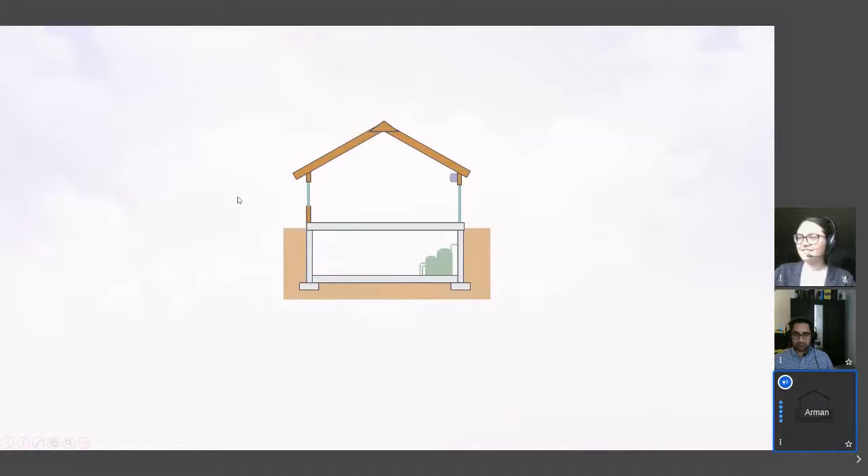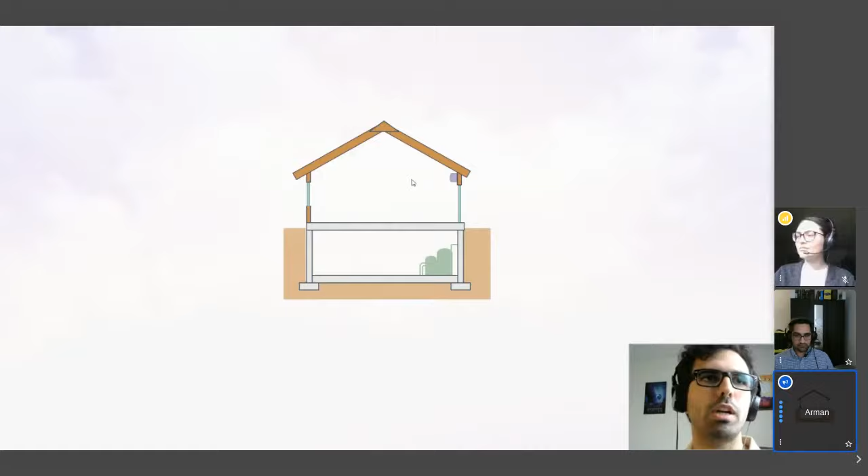In last webinar in March, we first talked about approaching energy efficiency in a building. When you talk with a builder about making their building more energy efficient, the first thing they may think of doing is working on the roof. For example, they may say, hey, we have learned that heat goes up because of hot air buoyancy, so we will spare no cost on the roof. We will make a very good system that performs really well, but in the meantime it is costly.

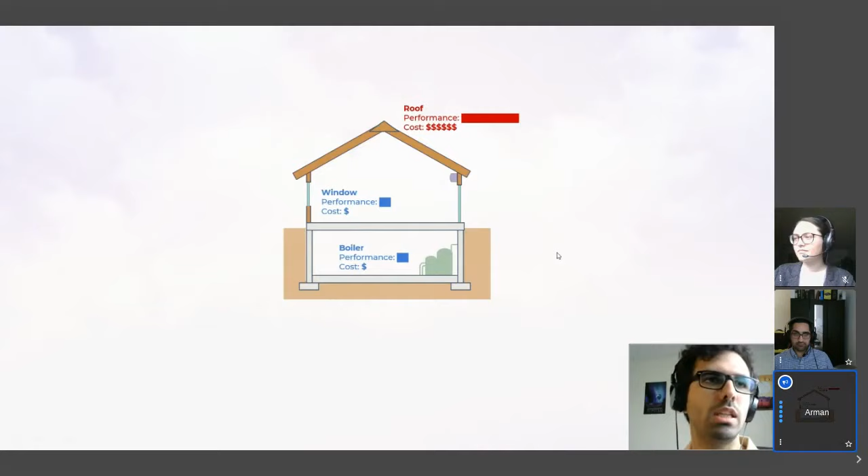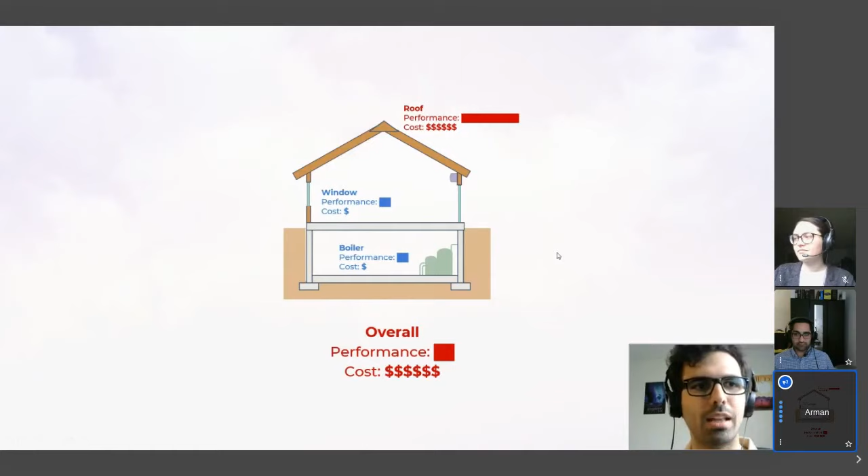They may skip doing more things around the house and think that should be enough, without working on the windows or the mechanical system. Now, if you actually give this to energy simulation software, which is the technology right now needed to ensure energy efficiency compliance in a growing number of regions, including British Columbia with the BC Step Code, you will learn that this house is actually going to perform really poorly, but it's going to cost a lot.

If that doesn't sound intuitive, the example we like to provide is: imagine you go skiing on a very cold winter day, but you go in shorts. You're uncomfortable, so you put on a jacket. You're uncomfortable, so you put on another jacket. That doesn't really create more comfort for you, because you're not addressing the place where the heat is escaping.

That's also the failure with this sort of design: the roof is over-insulated while heat is escaping from other areas of the building, and the mechanical system is inefficient, so the amount of energy that goes into it to compensate for the lost heat is a lot.

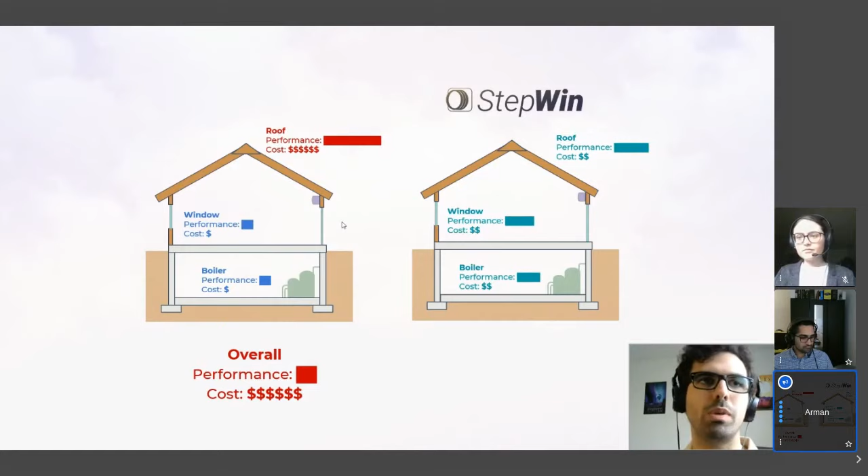Now if you take this design and give it to a StepWin, the first thing you'll notice is that we try to balance different insulation pieces. We find where we can save some of the costing from the project, and then find other options that may be marginally more expensive in their own class inside the building, but overall give you a more performant design and a more holistic performance.

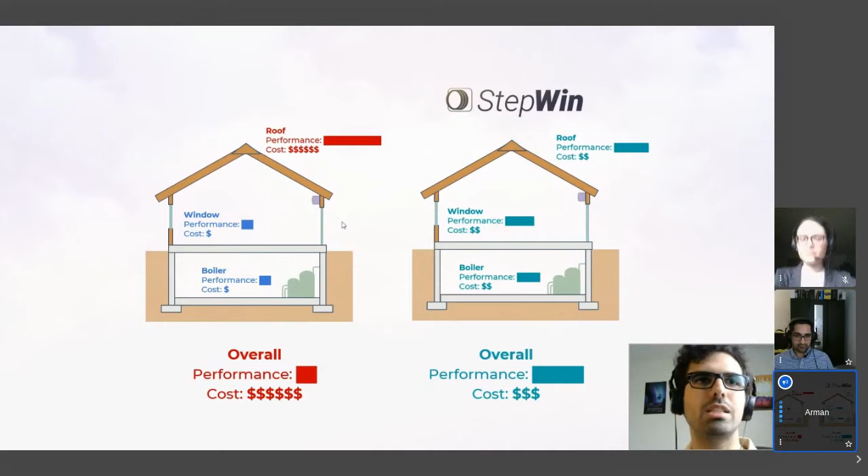Think about this example again like skiing, but in a tracksuit, a skiing onesie that has a very thin layer of insulation, but continuous and harmonic all around the body. You keep the heat in from all places, and this is why this building performs better.

We also talked in the last webinar about the amount of detail needed for starting an energy modeling process in a project. I think it's very important to keep in mind that you don't need to jump ahead a lot inside the construction process to actually have good energy modeling happening.

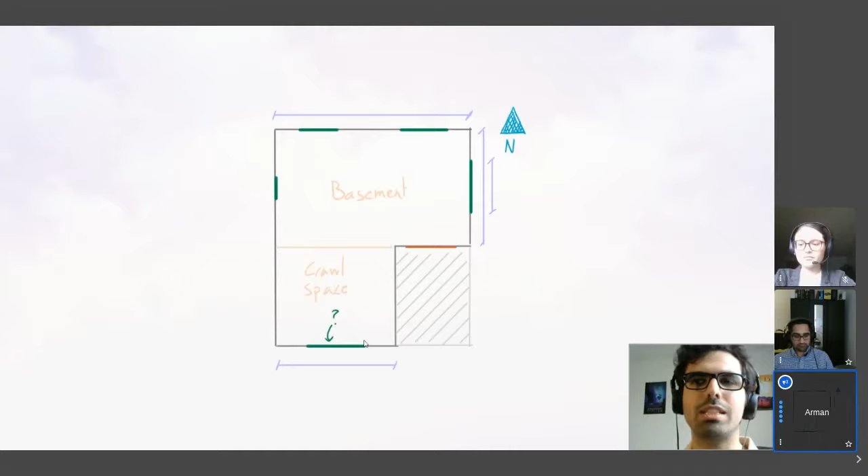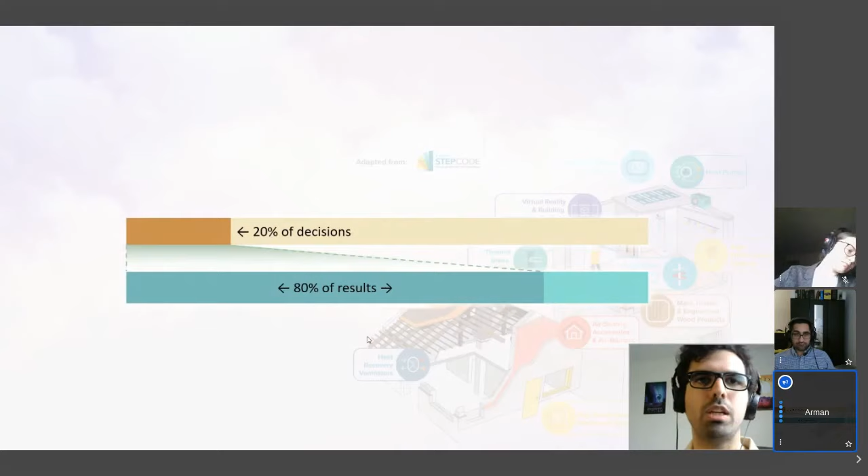Going early in the energy modeling process and energy compliance process is never a mistake, because we have seen this 80-20 scenario happening in different projects, that the first 20% of the decisions you are making in a project will take you 80% of the way. You want to make those decisions early on and create a solid foundation for the rest of the project to actually have high performance designs based on the choices you do. Failing to do that will actually limit all of the things that you can do to get your design to the next level, and that may create more costs and hurdles along the way.

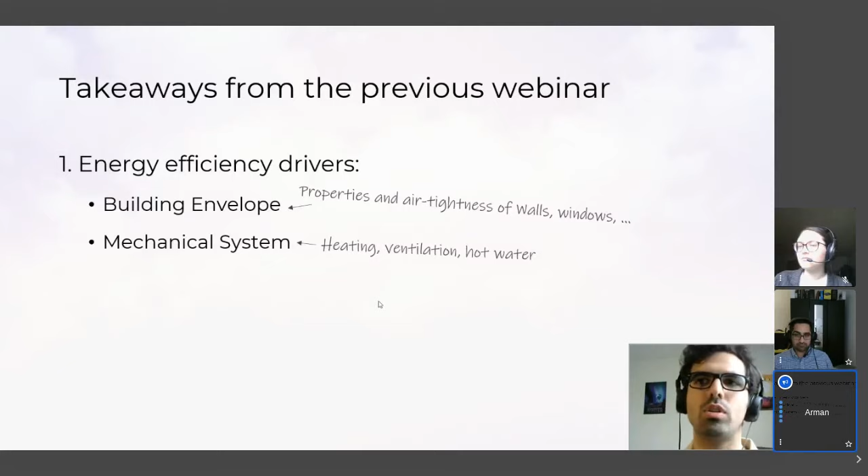So again, from the previous webinar, our key takeaways were identifying the energy efficiency drivers, including the building envelope, or the terminology of basically talking about properties and airtightness of the shell of the building, different pieces such as walls, windows, roofs, etc. And also the mechanical system, the heating, ventilation, hot water, providing those active elements. Think of these two as the active and passive elements inside the house, and they need to interplay with each other in order to make an overall good design.

Another thing we talked about in the previous webinar was a compliant design versus the best compliant design. I think this is important to keep in mind that there was this BC Step Code Metrics study done, which looked at a few options for different parts of the building. For example, for ventilation, 5 options; for windows, 7 options; for roof, 6 options. Multiplying all of this together gives you an enormous number of possible cases, which you cannot really switch between without considering each of them one by one.

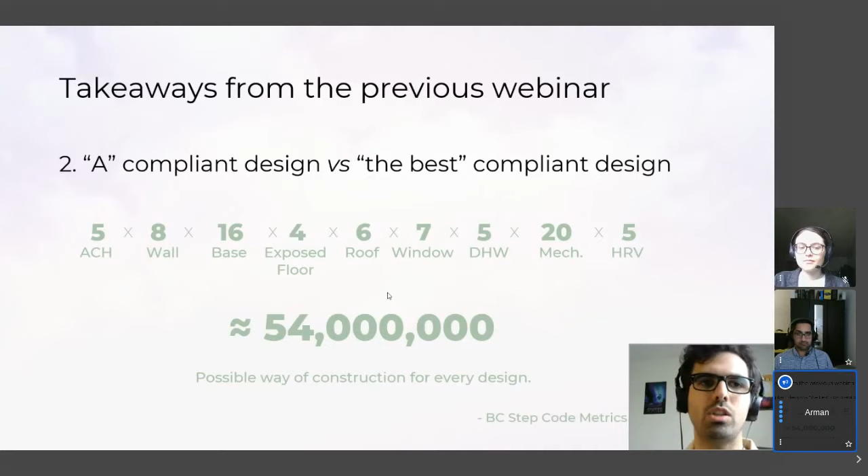We have this very important restriction when it comes to a project, by the limitation we have of finding what is the best combination. That may create a significant difference in the ease of reaching that energy efficiency level that the project can reach on the same budget. So we talked about these issues.

Now we are going to talk about solutions in this webinar, opportunities, how this transition in the performance-based construction is going to hopefully help us not only provide better products to our customer, but also use this opportunity to deliver the next generation of construction.

We're going to talk about 4 missing pieces in the design process that used to be there, and now they have become a necessity and they cannot be ignored anymore. We're also going to talk about energy efficiency and its relation with the rest of the building project, and we're going to talk about the success pieces for the stakeholders. Last but not least, my colleague Sahand is going to give you a StepWin introduction and talk about how all of these pieces tie together with the use of StepWin.

So let's talk about this webinar through a story. I want to tell a story of a builder. Hypothetically, let's just call him Sahand. He just bought lot 70, and he wants to build a dream house on top of it. So he goes around, he finds his architect, he finds the rest of the crew for his construction team, and they team up to create a project.

They go to their city—well, they don't go, hopefully, because of COVID-19. They check online, and they realize that the city is requiring them a step 3 house to be built in this lot, and now they want to take their performance-based project forward and find the best design.

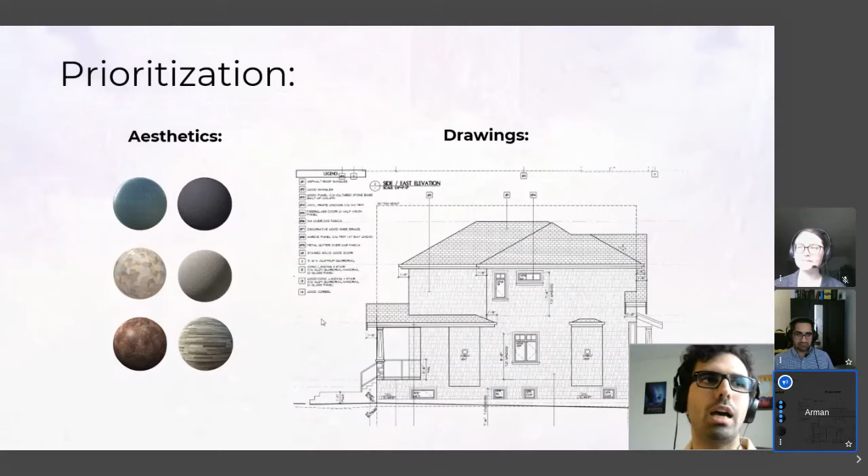The conversations really come down to the market of a house. Once they have finished all of these considerations, they will look at the timelines, the budget, the landscaping, all of those pieces. And last but not least, it's time to actually think about the energy code.

Of course, they have an idea about what sort of wall would pass energy efficiency, what sort of framing depth they would need. But doing the major work of energy efficiency is left for later stages. So the first key missing piece in this project is that energy usage has mostly been an afterthought.

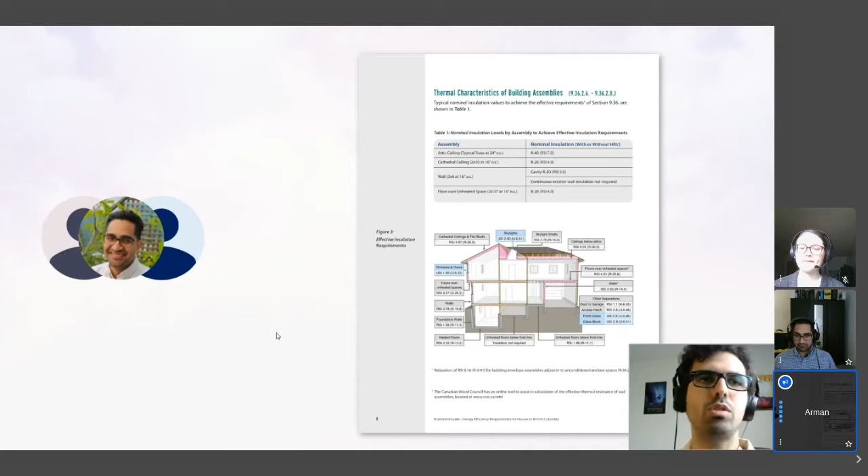Then when they go to look at the energy efficiency, the architect and the energy advisor from the construction team go by the climate zone. They will find perhaps this illustrated building guide, which tells them what level of R value or insulative efficiency they would need for different parts of the building. Referring to this, they can make sure they are putting the right insulation in the right places.

But the thing is, this separation of these systems in the house may not really give you an overall proper capacity in the construction you are doing. It's really case by case basis that the overall performance shows itself. Let me give you an example.

Here we have a wall, this white section, passing 0.25 watts per square meter of heat. And you have a window passing through 8 watts per square meter. The window is relatively very small, but if you look at the overall system performance, you'll see this total system is passing through 1 watt per square meter - that's 4 times the amount of heat that the wall on its own is passing through.

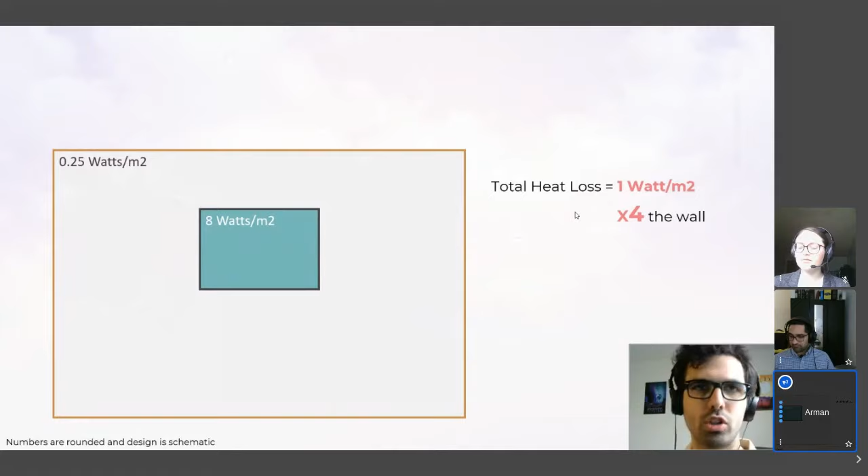But if I make the window even larger, that heat transfer is going to be much, much larger, almost 10 times the wall insulation level.

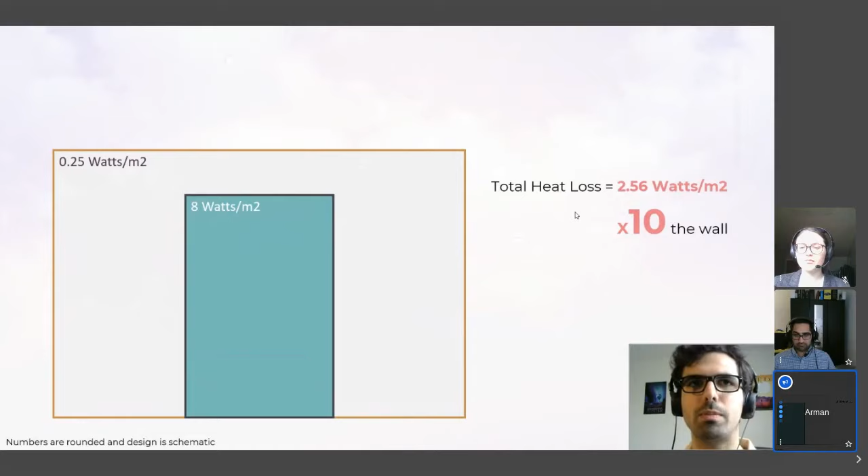If this doesn't sound intuitive, think about the building envelope - those walls and windows - as a bucket, and the energy being water in that bucket. Even if you have a very small hole, all of the water tends to escape from this envelope, and you need to invest in fixing those issues. It doesn't matter how thick the wall of the bucket is - the water tends to escape from the path that it can escape from, and that's the holes.

So the second issue is that looking at different building components individually is not yielding an overall strong performance in potential cases. It's a case-by-case basis depending on what project you have.

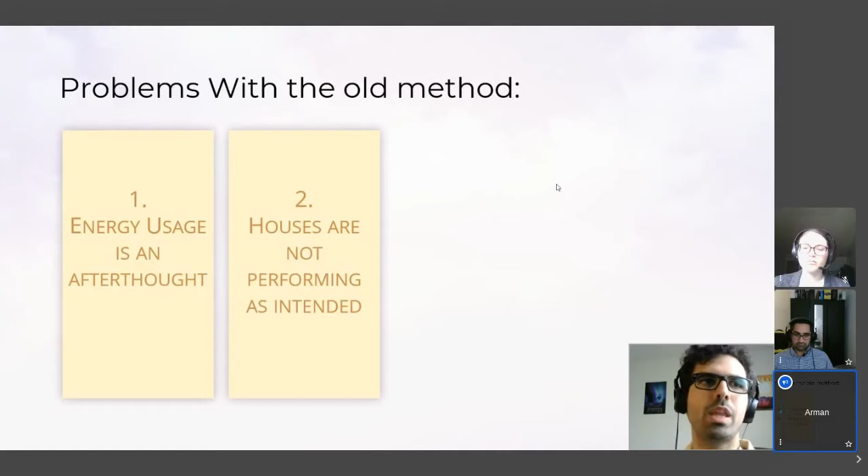When we look at the Canadian data, we see that the average house in Canada, based on numbers from a few years ago, is spending more than 120 gigajoules of energy per year. Putting this into context - imagine when you make pasta, you put cold water on the stove, how much energy it would need to bring that cold water to boiling. Now, 120 gigajoules is enough to boil up a swimming pool.

And that is for one average house for a single year in Canada. So the importance of moving to something better should make itself apparent.

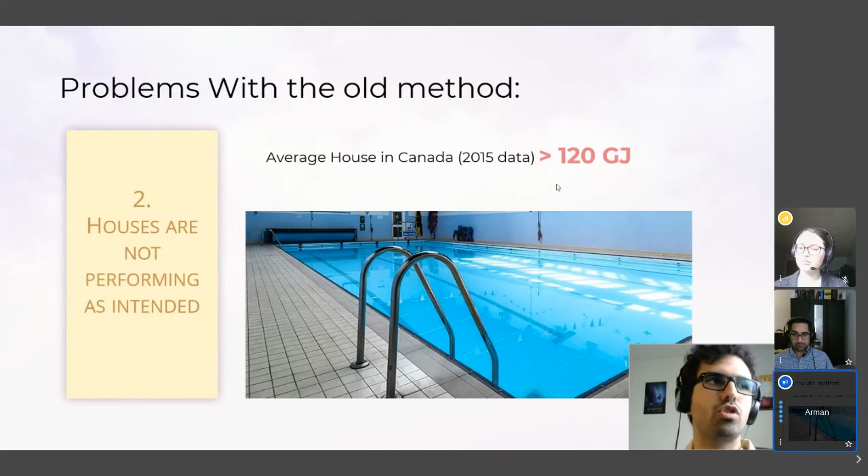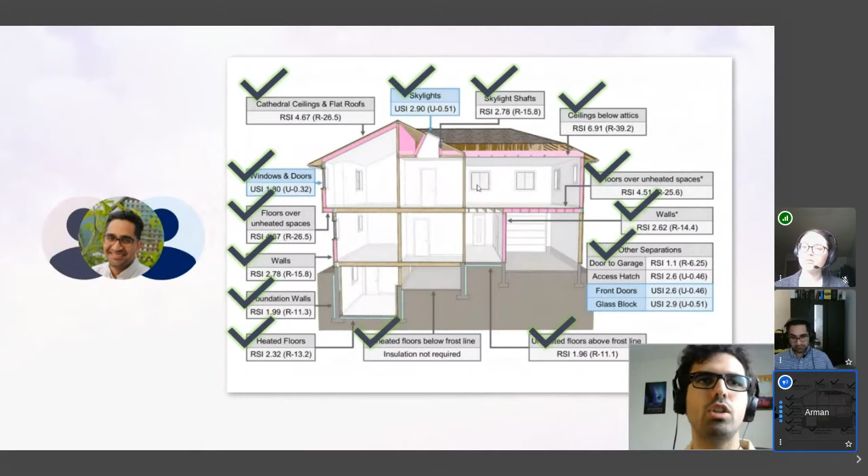Okay, so let's say we take it at an individual level - we look at different individual pieces. So Sahan's team, the architect, the energy advisor, they take note from these systems and start putting that information down. Now it's time for Sahan to start calling different manufacturers. So he finds three companies for windows, three companies for framing and installation, and multiple companies for other things, and starts making choices between these companies.

So for the windows, he goes with company B, and when all of the properties are the same, the aesthetics are the same, it all comes down to Sahan knowing he has a high school classmate at that company who is a sales rep, and he just goes with that one.

For framing and installation, again looking at very similar quotes and situations, he goes to company C because they worked out in the last project, and that's a more than valid reason to use someone for this project as well. For other aspects of the project, he may continue working with people based on cost recommendation, his intuition about why one product or company would work better than the other, or some arbitrary reason.

This brings us to the third problem: building choices do not need to be scientific. Well, some of them need to be, but a lot of these choices are left to the builder to make, based sometimes on external factors that don't really have anything to do with the quality of construction. And last but not least, all of us have a finite amount of time, so in the process of finding the right product, contractor, or supplier, some people get missed - lost opportunities that potentially could have provided better quality construction.

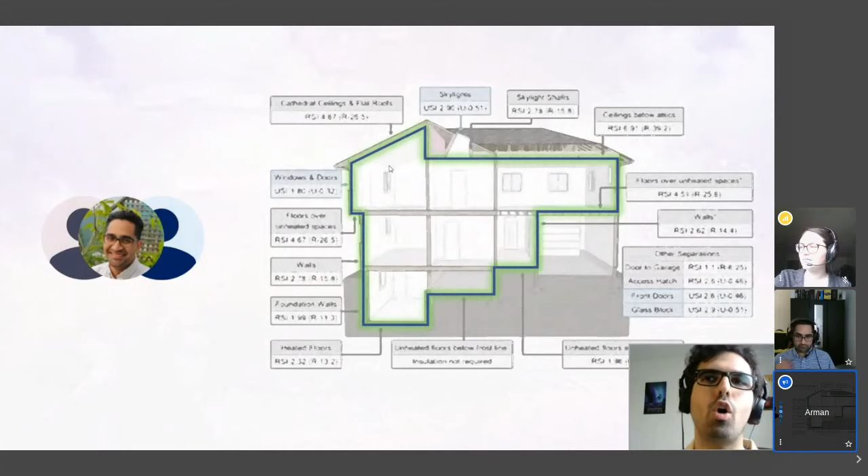Now, in performance-based construction, we don't really think about individual components - thinking about the examples provided, it only works if we think about the building as a whole. So the construction team will go through the whole system, look at the whole envelope, identify the key pieces and weakest paths of heat loss, and try to holistically make the system better. They'll try to keep the heat or cool in and minimize the need for active elements, which will make a home that needs way less than 120 gigajoules of energy every year.

But this also creates a new challenge, because anything you change in this house is tied into all of the other options you have in the construction. So every change will have cascading effects on other changes, and this is not intuitive for the construction team to navigate. Coming up with the best design seems almost impossible with the previous systems to go through this design process.

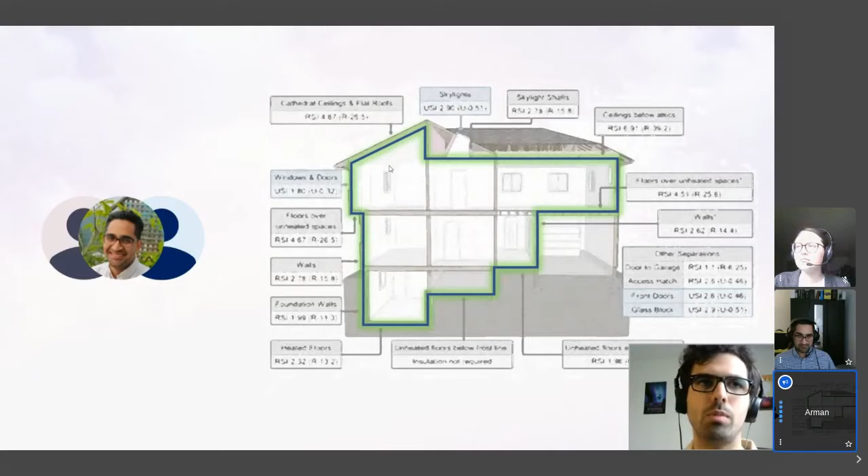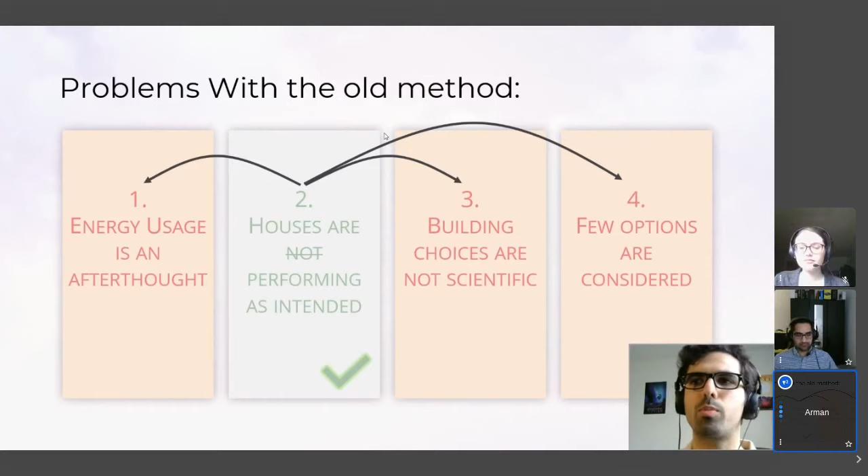So as we started to solve problem number two - that houses were not performing as intended - we have exacerbated the negligence of other problems we had in the construction process. We cannot now omit the usage of energy efficiency early within the project. We cannot go with gut feeling for finding the best construction choices. And we cannot limit our scope in terms of what building choices are available to us. Finding the performance solution requires all four of these problems to be solved at the same time.

So that's what StepWin essentially does. We take all of the choices you have within a project that may confuse you, or may not give you that foundational design you need based on your project. And as every project is different - each project can have 54 million possible ways of construction for that individual scenario, based on climate, the shape of the building envelope, and the building shape in general - this system becomes very, very complex. But StepWin simplifies this process by a lot.

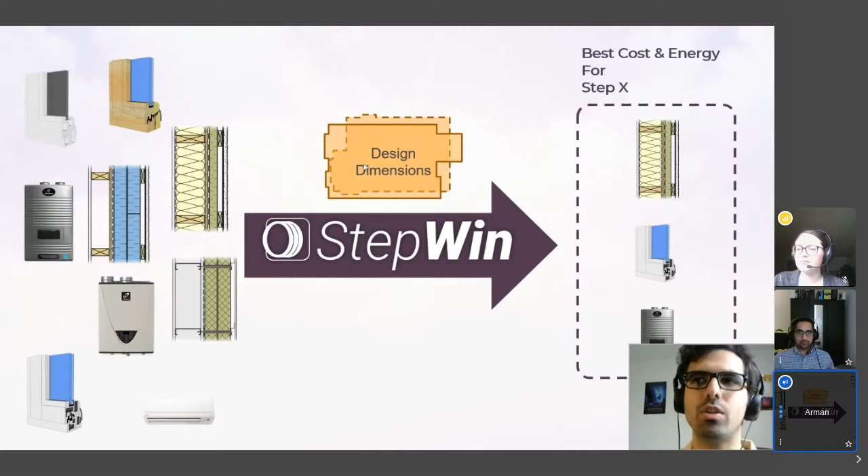We basically get all of the choices and dimensions you have, the sort of building you're thinking about making. And again, the level of detail will be very low, something you can start using at the very early stage of the project. And a StepWin will give you the best cost and energy performance for that particular step, cherry picking all of the options that work together integrally, and they are also not breaking the bank.

Thinking about this system, it really works well when you have a starting point. So let's say Sahan is limiting his design process to finding his process constraints, finding what sort of things is most important for him. And he comes up with three window systems that he wants to explore more than everything else.

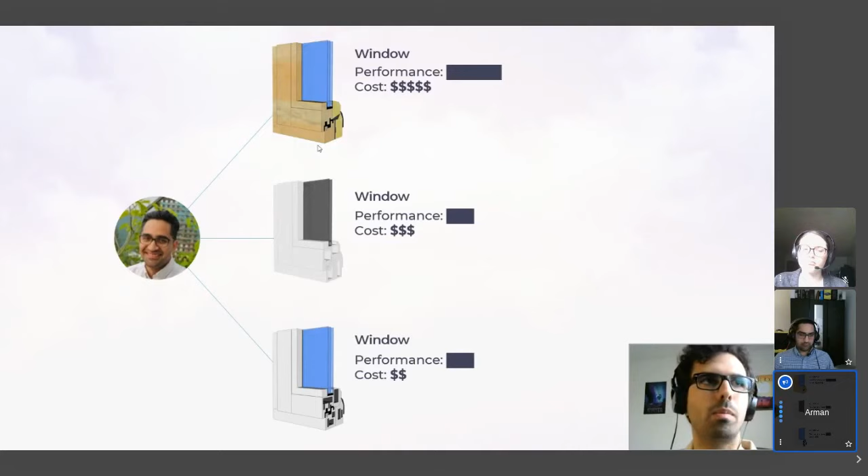One of them is very costly, but is also high performance. The other two have somewhat comparable cost and somewhat comparable performance. Without a tool like StepWin, he may go with one of those. But as you look at this project in the whole arc of it, you will see that each of these systems, each of these starting points, sends Sahand down a completely different route.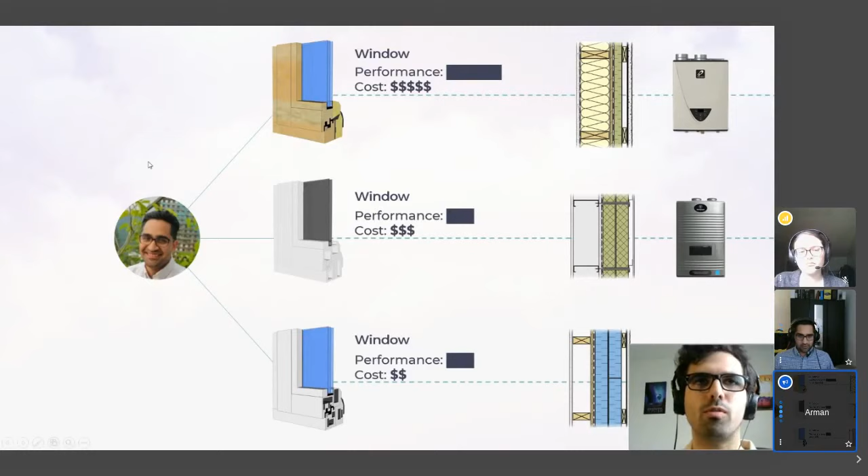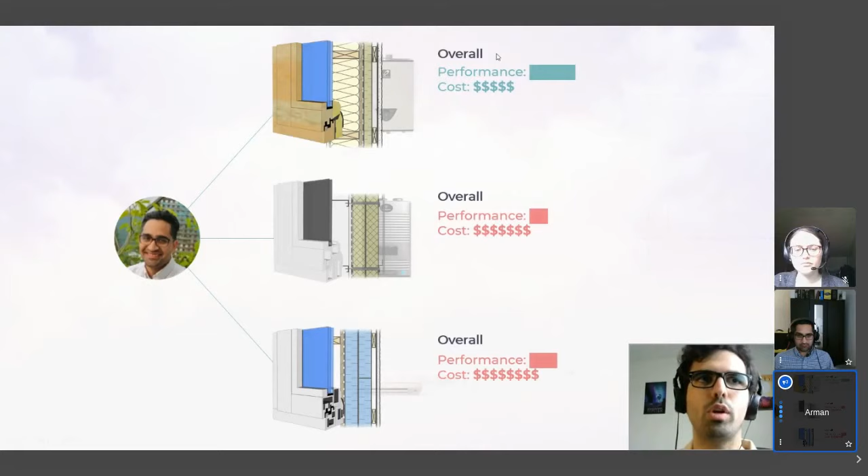A route where each of these building choices may lead to other choices. And when you look at the overall performance of the building, you may actually see that that expensive window, although it seemed like a premium in the beginning, at the end of the project, when we look at everything overall, has been a cost saver, because you didn't need to go over other parts of the building and try to compensate for its shortcomings. Think about the example of the leaky bucket - we're essentially just spending our funds on addressing the leaks instead of doing other things.

The other byproduct of this process is that now Sahand has very specific criteria for what he will need in the project. We just don't ask him to go for a high performance window. As you will see when Sahand goes over the StepWin reporting page, what we're telling the builders are very specific numbers - for example, it could be a U value of 1.2 and solar heat gain coefficient of 0.35.

That would mean that the manufacturers who are providing that flexibility in their options are going to be the best choices, because now we have a lot more capacity in order to meet the project's demands.

So I want to leave you with these conclusions, bringing everything back together: a successful construction team works on three major things. The first thing is that they start the energy efficiency conversation early. You may get tired hearing this from us on and on, but the reality is that this conversation for many projects is not being started early. So start it early and know the level of detail necessary for that - it's not a lot.

The second thing is identifying the right project constraints, where the project can use some of these options to come up with a better design, and where it's very important for the design team to limit the options and start those limiting options as the starting part of the design process.

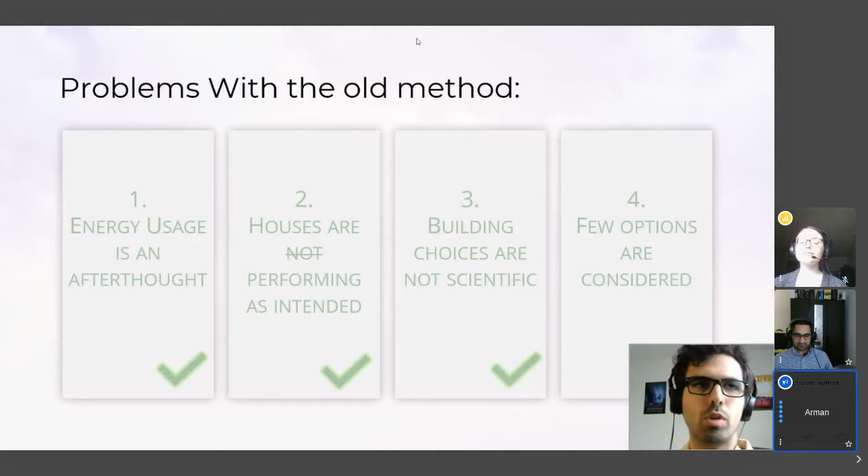I'm Sahand and I'll be doing the StepWin website demo for you guys. This is our introductory page, with an introductory video that our team has made, and we're going to go to the first step of this process.

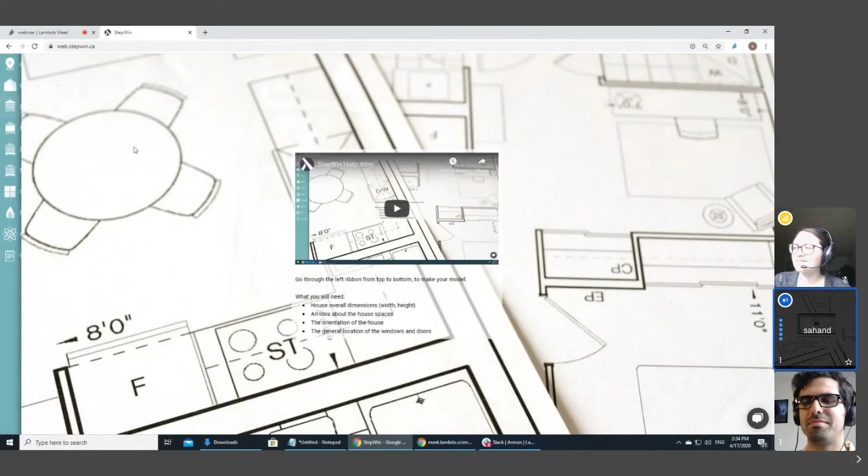The first step is the climate page, which will be asking for your address. Here we have a dummy web address at Port Moody. We're offering services at Port Moody, New Westminster, Kelowna, Kamloops, and Penticton currently.

After you input your address, we go to the general page, where we ask for the general shape of the building. For this case, we have a 2-story building with a hip roof and a cathedral roof, and basements for this building.

But we could have any combination of these. You could have flat, hip, gable all together, or you could have crawl, slab on grade, or basements all together, and depending on which option you choose, we might ask you for different things.

For example, since we're asking for cathedral, we ask for house volume, and you can choose whatever units you're comfortable with. For example, I'm choosing cubic feet here. We'll also be asking you for exposed floors and adjacent unheated spaces.

There is an information button here that you can click on, which will take you to videos explaining exactly what these are.

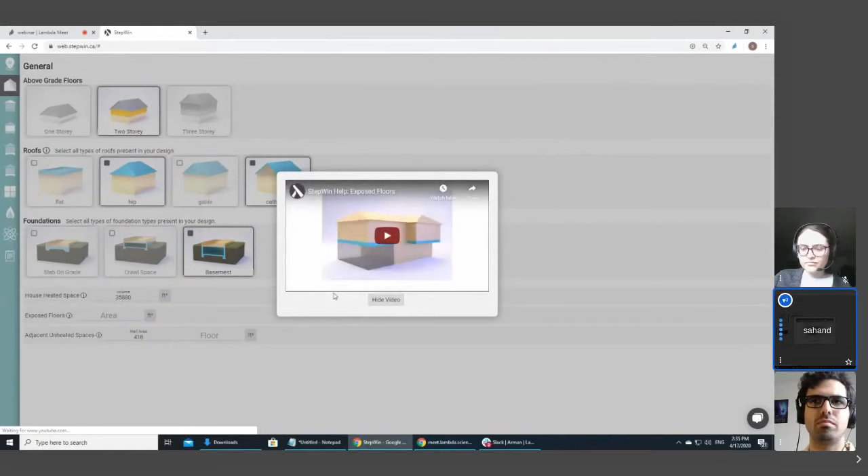On the next stage, we're going to do our roof assembly design, so we'll have interior and exterior insulations for our cathedral roof. These are default assemblies, but we can add other assemblies as well.

You can add your own custom assembly with your own R value, material cost, and labor cost. You just fill in this information, and our software will include that into your computation and optimize for the best cost and best value for this specific design.

Since we have a cathedral roof, we also have the option for skylights, so you can put the correct direction for the skylights, their dimensions, and the type of skylights they are.

We go for the attic roof next, its dimensions again, and the default assemblies we have, which are 12-inch and 18-inch blown-in insulation. But feel free to add your own specific insulation needs, your own costing, and your own R values, and our software will include that in our computation.

The next page will be our main floor and second floor wall assemblies, basically, and the general shape of the building.

You'll be asked for your wall assemblies, and you can add your own different wall assemblies here. You'll also input your area parameters and the wall heights for the first floor and second floor.

We'll also be asking for your windows and all sorts of openings - windows, patio doors, entrance doors for the first floor and second floor.

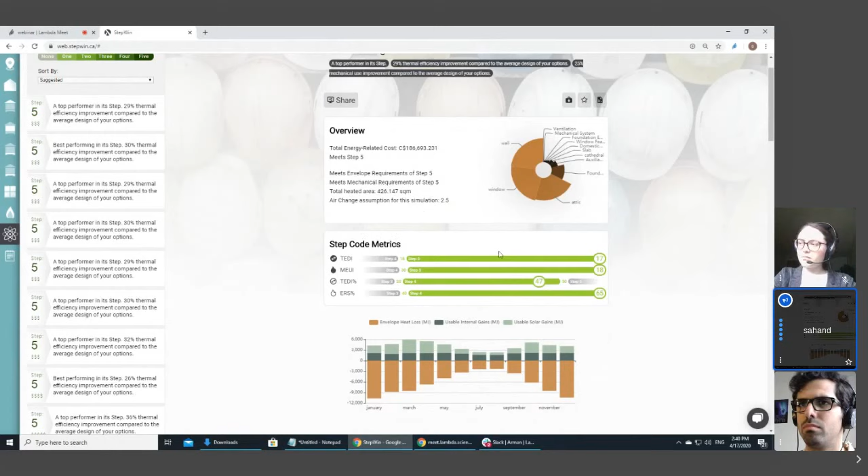And we're providing the most important factors here: your TEDI and MEUI values, and your TEDI% and ERS percent, which indicates that this house is a very, very efficient house at step 5, basically.

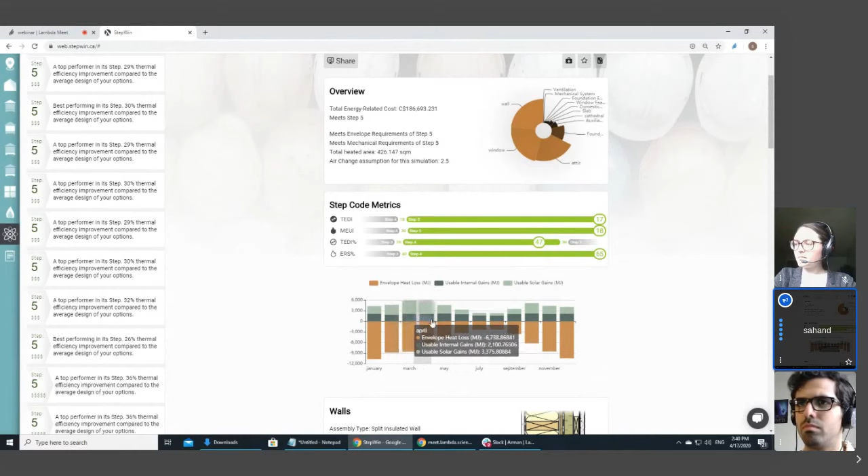We have your heat losses here, and as you can see, in the springtime you get a lot of sun in the house, and it heats up the home. It's usable, very high usable solar gain. But when it gets to warmer months, you don't really use that sun much, and in the winter times as well.

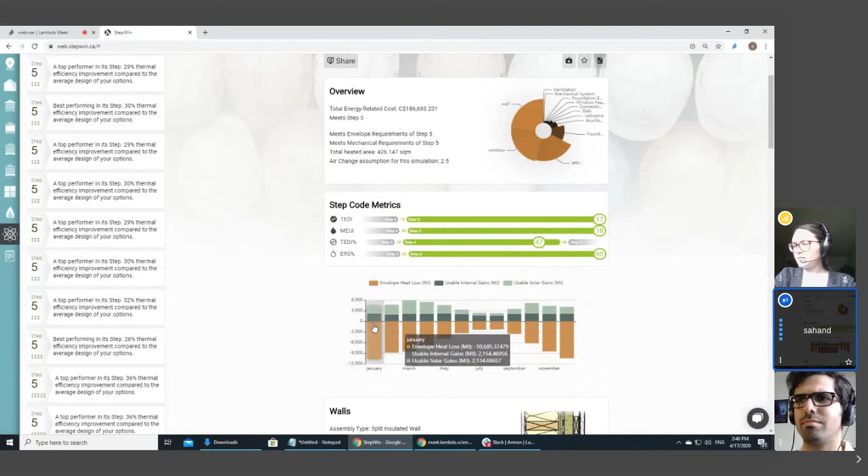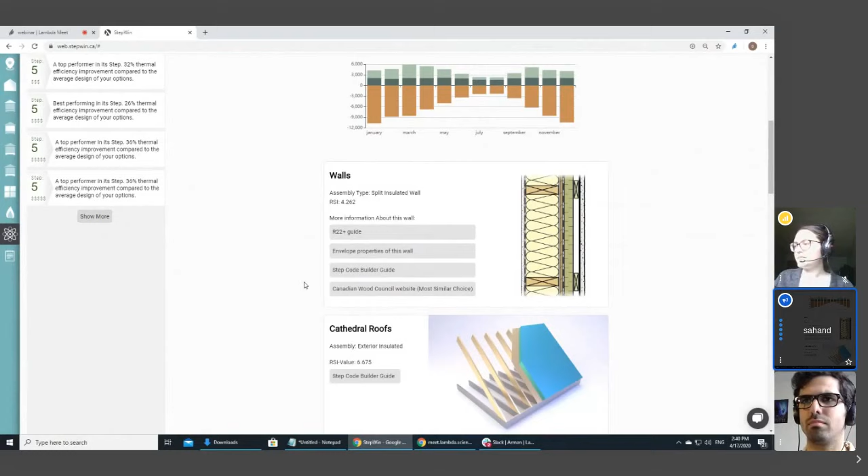And we also have the details of this wall. So we have split insulated walls, and then we have all the guides linked here. You can click on these and go to these links to see the exact details of how to construct these walls and their efficiencies. Also for cathedral roof, attics, and windows, basements, and here we have our cost breakdown.

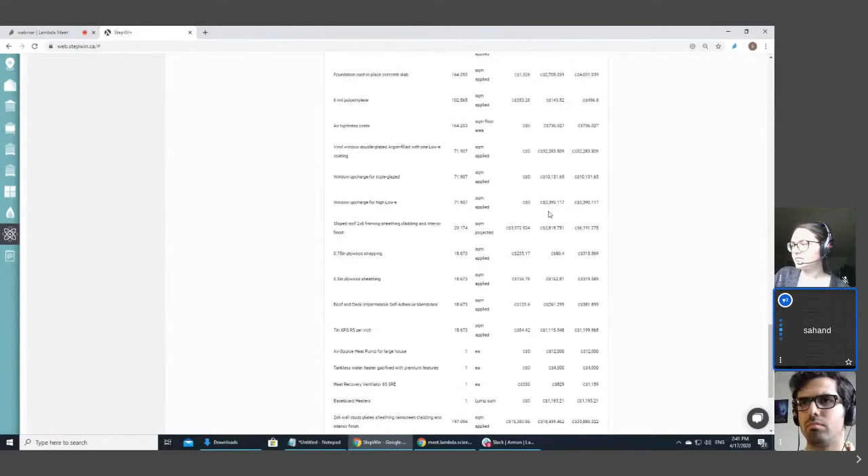And it goes through exactly how these costs were calculated, and if there are differences here, make sure you add that to your own, and maybe you can create another wall assembly and use that, because again, costs will be different in each region.

If you like this design, you can store it, and this will be saved into our memory, and you can later on review it in the comparison sheet.

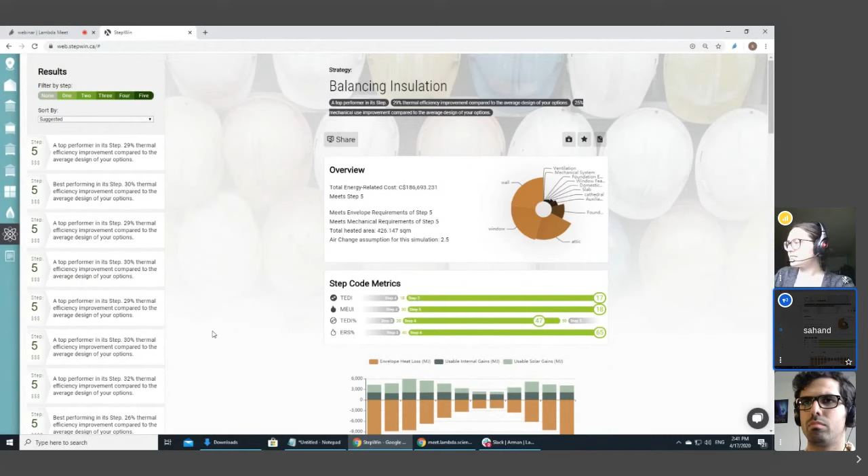I'm going to go over a few other things here. So we can also sort by price, and this is the cheapest design we have here, for example. And we can look at the easiest constructability, like step 3s or step 4s. And these are all other options.

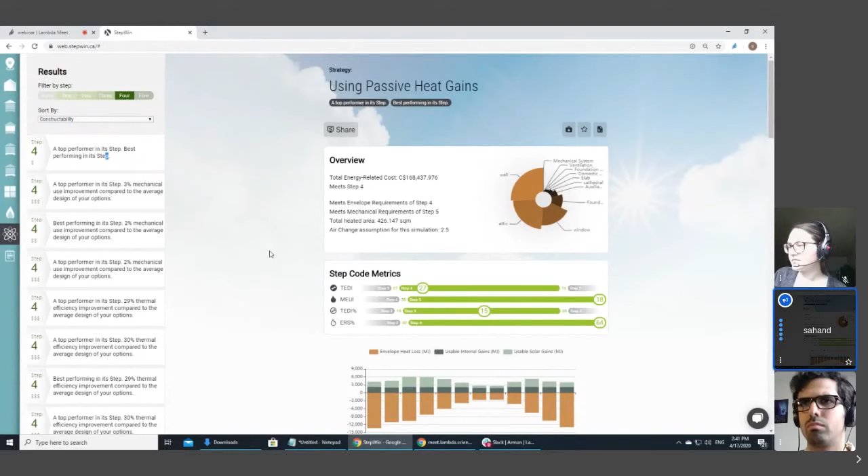And if you like any of these, you can add them to be compared. You can share this design with your architect or energy guide with just a click of a button here, and this will download the H2K file for you, which you can easily share and run through the HOT2000 program. So that will be very handy for your HOT2000 guide.

And the next thing I wanted to cover was that we also provide your greenhouse gas emissions here. Let me see if we have it. So we have the greenhouse gas emissions here, and this house has good emissions, very low emissions anyway.

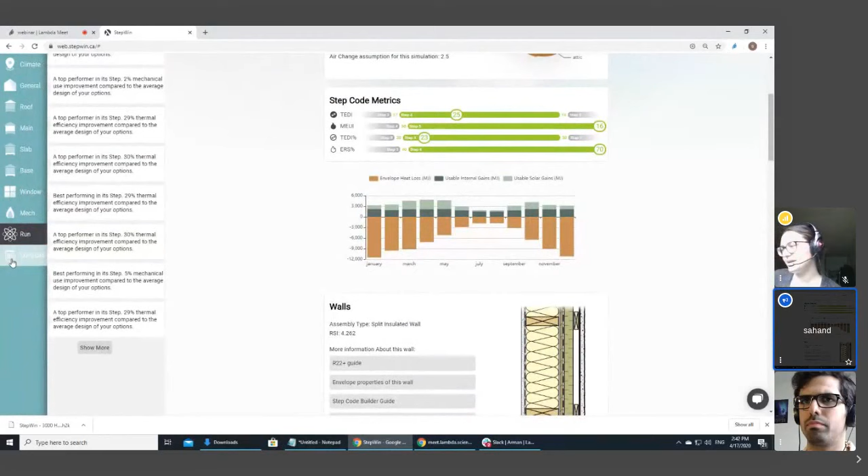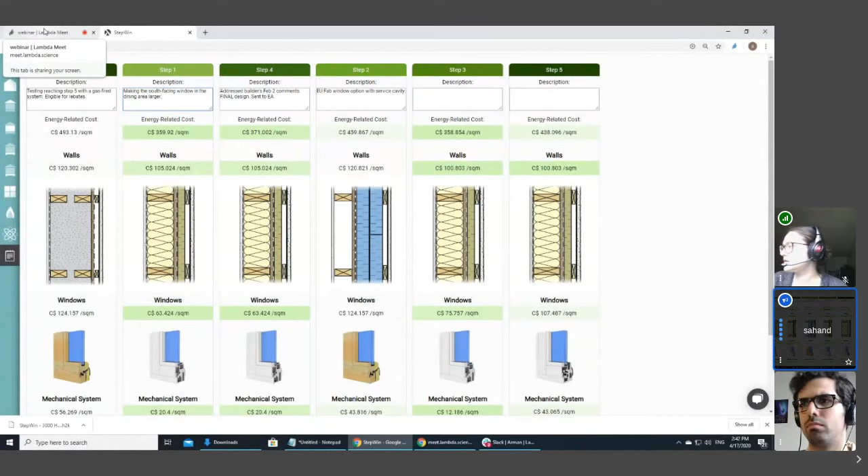Thank you so much for the comprehensive introduction. Okay, so San, we are still missing your video, but oh wait, there you are. Okay, okay, so thank you so much for the very good introduction. And now we are going to just start going over the questions, which I know you have many, as this was meant to be a teaser.

Keep in mind that you can access StepWin through the website, and there are helper videos along the way to help you go deeper into the specifics of these designs and options that we have. You can pretty much build anything with it right now. So as long as you have a single family home, you should be fine. And if you have a multi-unit, please make sure to reach out to us.

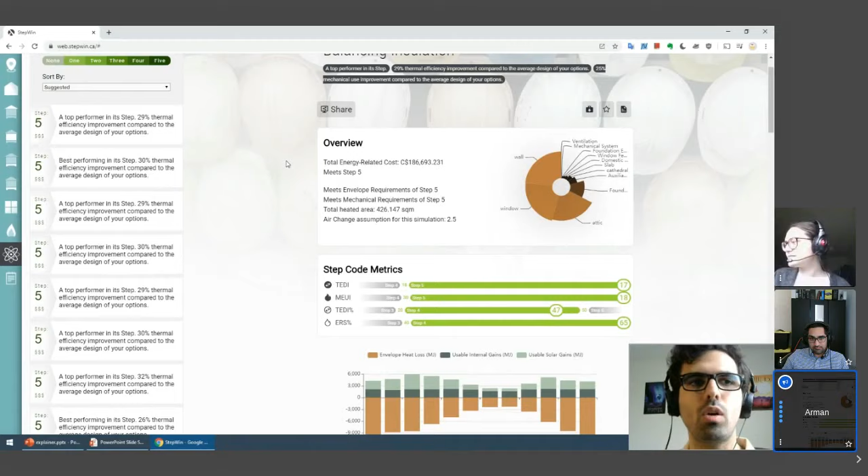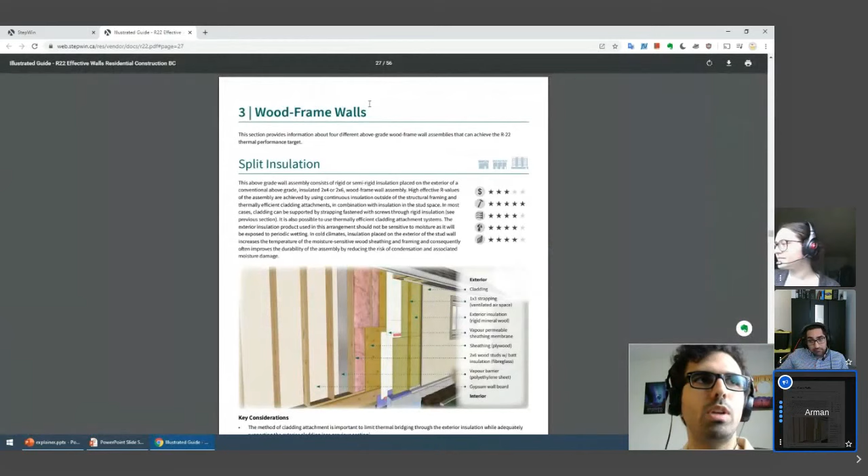That is where StepWin hands off to the energy advisor. We give you a very handy report, which Sahand went over, that has all of the information you will need from a project, including some of the guides that BC Housing and other stakeholders in the industry have provided, which we show you, taking you to the exact page where different assemblies are featured with the information you need.

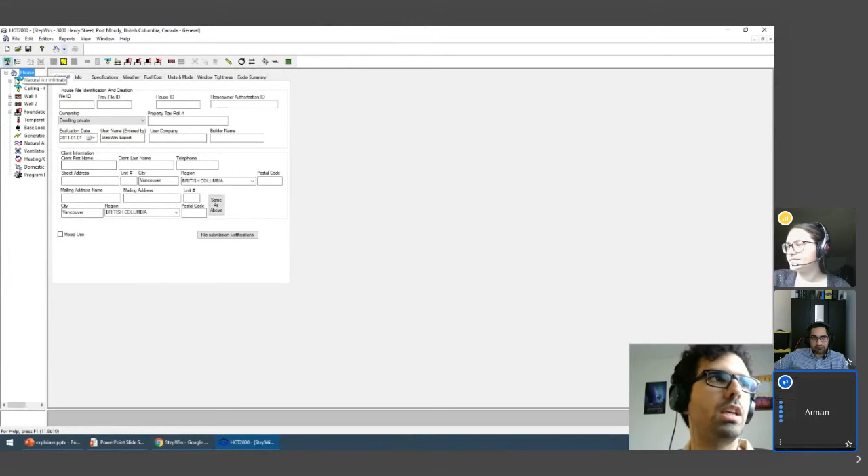Beyond this living report, we also give you the opportunity to export this design as a HOT 2000 file, as Sahand mentioned. This HOT 2000 file is not meant to be a full EnerGuide file that the energy advisors produce. It's meant to be a starting point for your design, containing all of the information you put into StepWin, including all of the windows, all of the wall sizes, and so on. So I put one here showing different ceilings and different walls that we've exported from StepWin to HOT 2000.

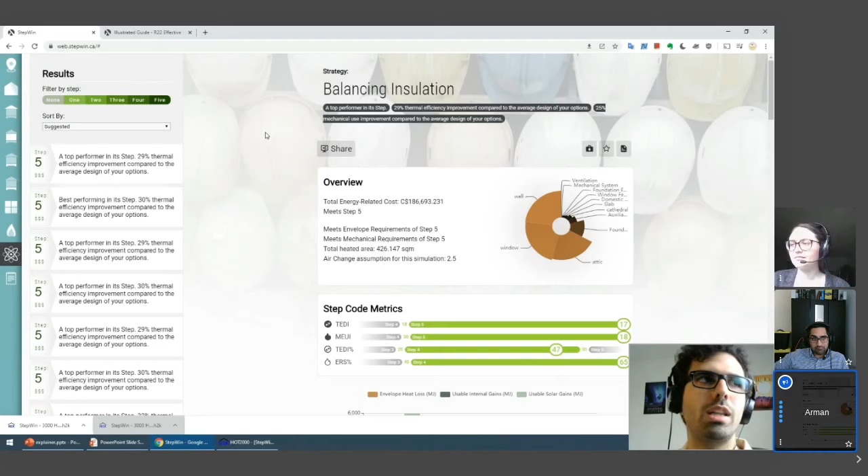But at this point, your energy advisor has the better tooling and knowledge to take your project to the next level, and that's where we hand this to the energy advisors. So you can definitely make good use of this HOT2000 exporting option, but keep in mind that we are not trying to replicate the work of different energy advisors and professionals in the project.

I just want to add, when you are signing up we have a disclaimer and usage notes that are very short. You can go over them in less than a minute or two, so go over them and understand what StepWin does and what it doesn't. Hopefully that answered the question. All right, thanks Arman, moving on to the next one.

Lloyd asked, can it look at foundation wall interface or wall roof interface? Oh, for sure. So moving to the foundation interface, we look at different alignments of insulations. That's the only thing that's important for us.

I invite you to actually create an account with StepWin and go to these pages yourself. But the important piece is that the helper files show how we are collecting that information from you. So we ask you for the interior and exterior insulation separately, and we see how they overlap with each other, and we get an idea of the air leakage paths from your building. And we have an explainer video for that as well.

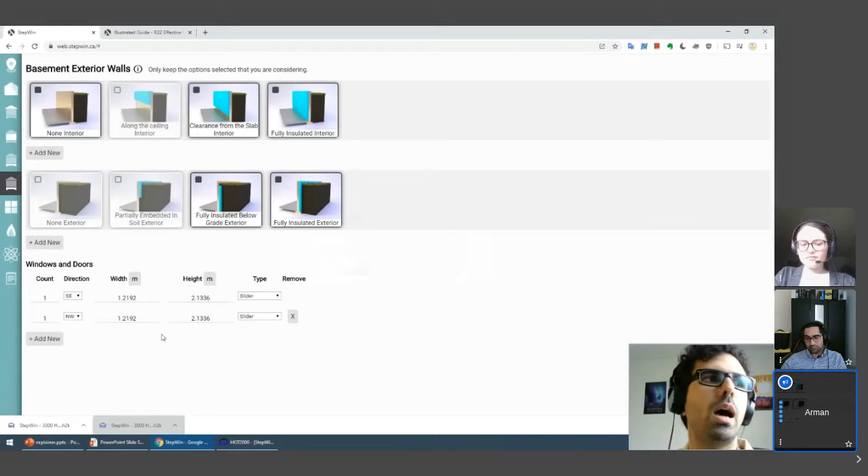Essentially, all it comes down to is you putting on where you want to put the insulation, put the window dimensions, which is width and height. And as Sahand mentioned, you can just click on the unit to change them to feet. And a slab in the same way, where do you want to put the slab insulation and what sort of slab areas we are talking about.

For the roof, it's a very similar thing. What sort of insulation you want to put in the roof, what is your roof area and the slope, and what sort of skylights you want to put in. So these are the three things we need from you basically: what sort of assembly, what is the area, what are the penetrations. And that should be more than enough information for us to start doing your energy modeling.

Perfect, thank you. We have a follow-up question in regards to the first question you answered. Matthias asks, following up on the effective R value comment, are you following a particular method to calculate the effective R values? Okay, that's a really good question.

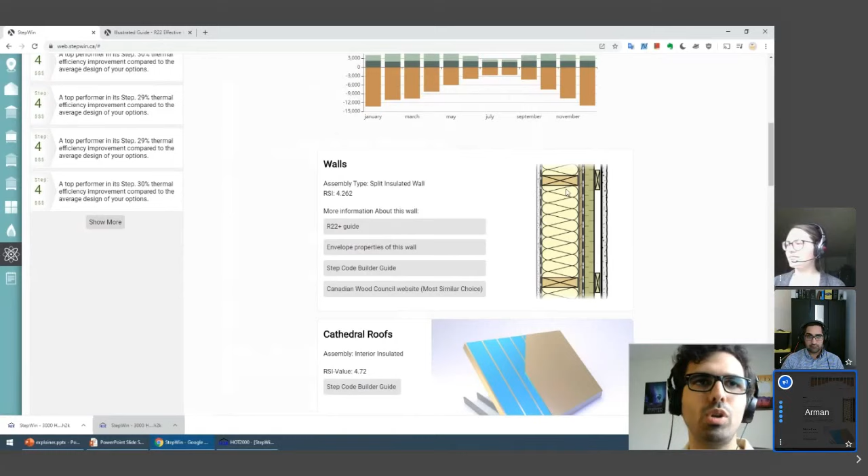Thank you. Yes, so we typically tend to stay true to what we see in different guides that are published by government or credible sources that are going to give you and us information. For example, when you go to your reporting page here in StepWin, we give you some sources for different assemblies that we have chosen. And in some of them, you have the Energy Step Code Builder Guide or R22 Plus Guide and whatnot.

So I clicked on the R22 Plus Guide. It takes me to that guide and the specific page where they have this wall featured. And there you can find a sheet showing how they calculated the R value for the assembly, and that's the one we have used in our interface.

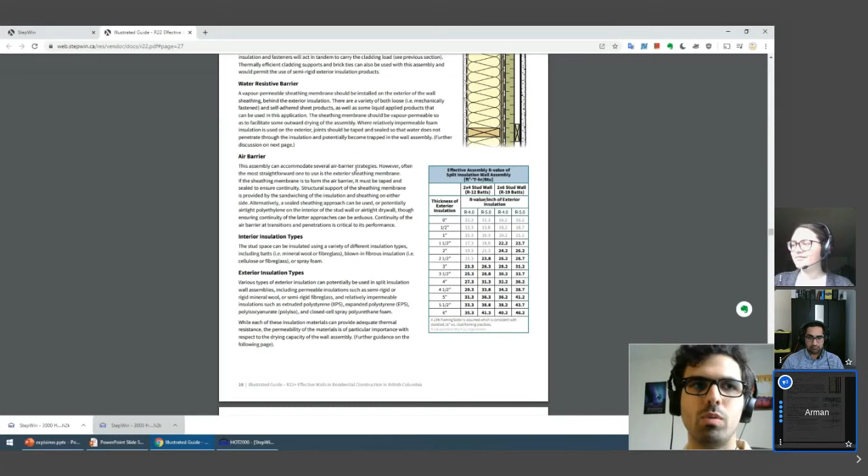Now, knowing full well that different penetrations and different project conditions may actually significantly change your effective R value, the way you are working with the air films inside and outside, all of those considerations may change the way you calculate the R value. Think of these numbers as the starting points.

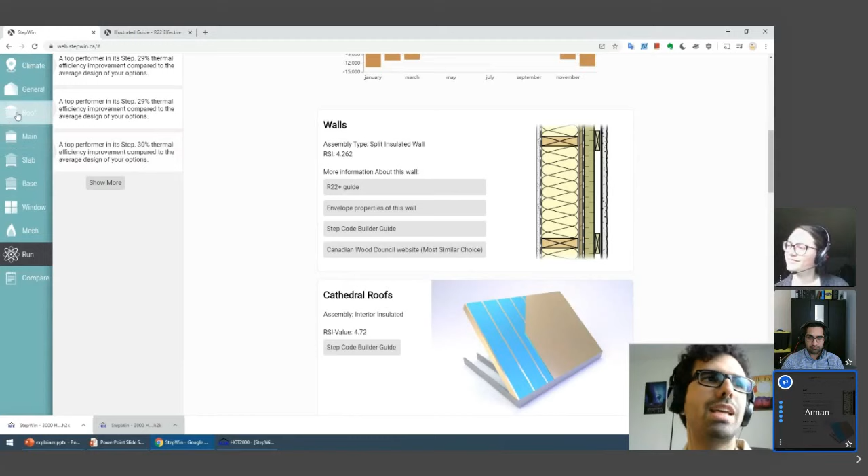And whenever you hover over, for example, I go to the roof page right now and I hover over each of the wall assemblies, we show you what R value we have put as our assumption. This is something you may be able to reach with the level of insulation and calculation method you have. If not, by all means, feel free to add your own system and deselect all of our systems, so you know that you are comparing the roof systems that you have in a fair way.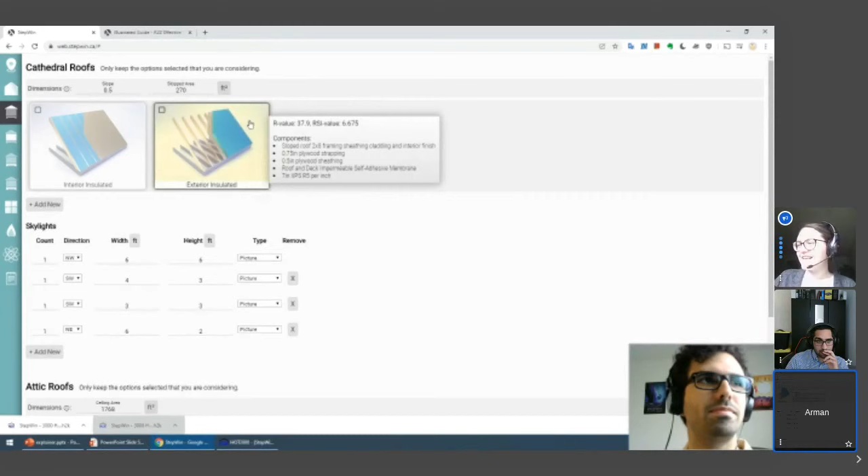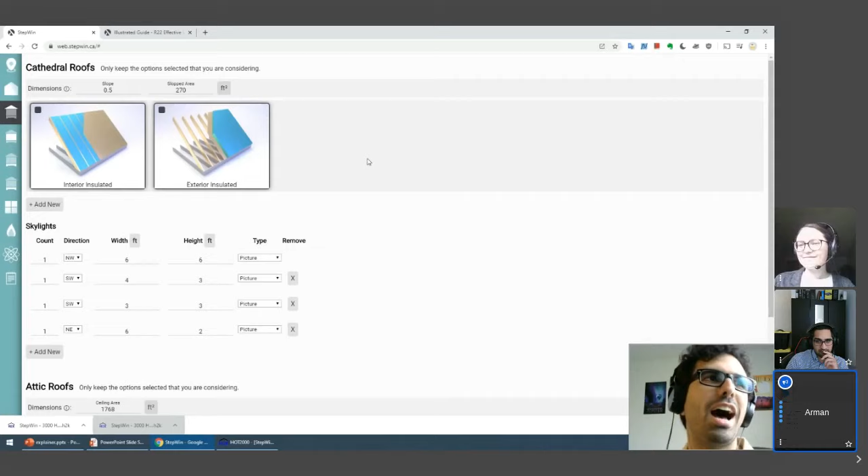Meredith asks, how quickly will you be adding climate data from other jurisdictions, say from Invermere? Invermere is in the eastern part of BC, closer to Alberta, on the border. That's such a good question. We are working really hard to bring in new climate, energy efficiency, and costing data from different parts of BC. We reach out to different municipalities to see how much interest there is from stakeholders in the industry to make that growth happen. We've been adding many cities since the start of the year, and we're hoping to keep the pace and move on to newer regions.

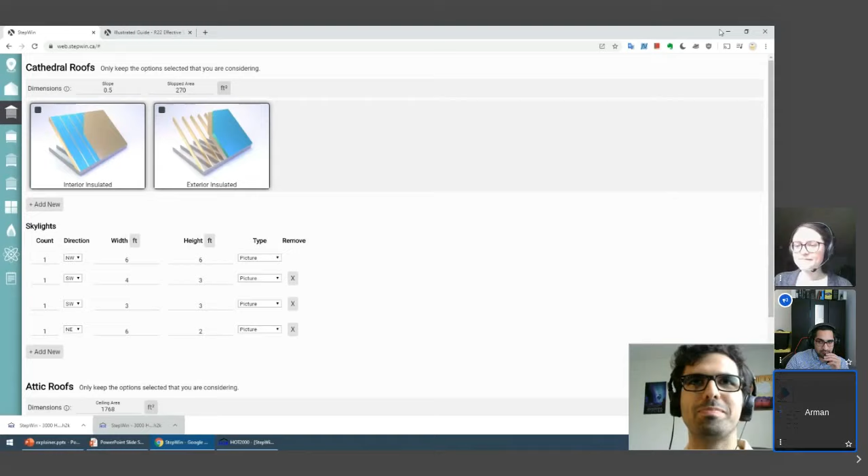Meredith asked, could you repeat the list of what climate zones are already included? Yes, for sure. We are right now available for the City of Kelowna, City of Kamloops, City of Penticton, City of Port Moody, and City of New Westminster.

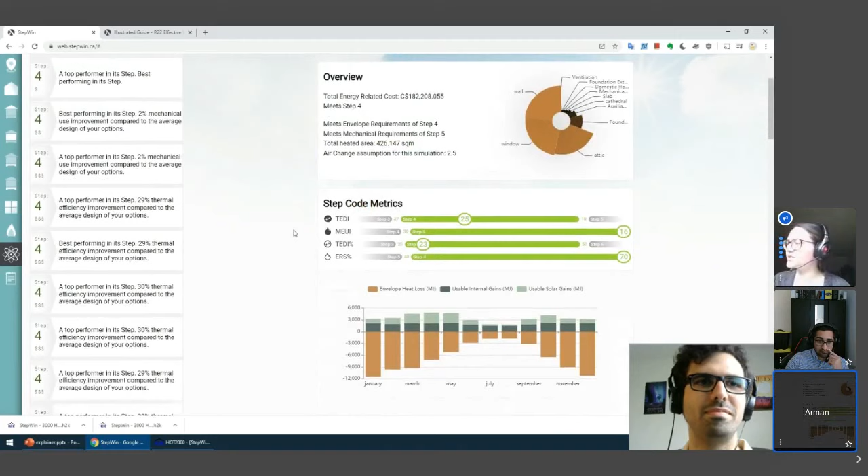Perfect, thank you. Another one: do you consider the overheating comfort implications of using high solar heat gain windows on southern and western elevations? This is a problem when there are high window-to-wall ratios. Oh, great questions today, people are great.

One thing we needed to focus on was what is anticipated in the BC Step Code. Unfortunately, Step Code does not have considerations for overheating or overcooling, which we think is something that should definitely be improved as our province moves towards a warmer future. Climate change is going to make us rethink that cooling argument. What Step Code does provide is a small relaxation for mechanical energy use intensity whenever there is air conditioning in the house, a small bump that we consider in our system.

The closest thing we provide to that is this graph showing envelope heat loss, usable solar gains, and usable internal gains. But this doesn't really show the total solar heat gain coming in from the south and west windows. We definitely think StepWin must, in the future, give users an option to see the risks and factors of overheating and how to mitigate that problem. There's a lot of great work that can be done with different coatings, overhangs, and even extra shading for windows, and providing that information for the user is going to be very important.